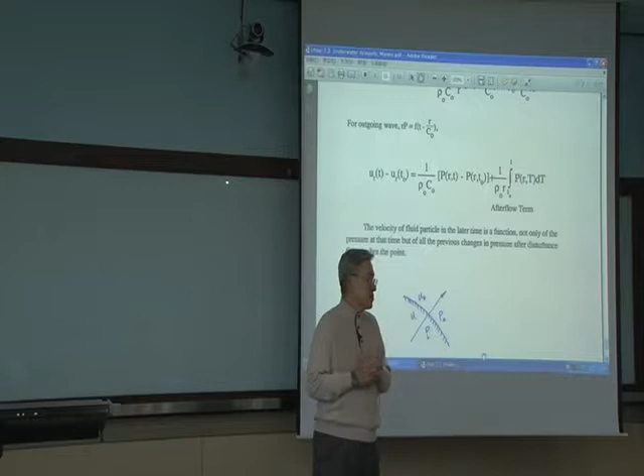I spent some time in chapter 1 and chapter 2, and this is the last part of chapter 2. If you look carefully, chapter 2 contains very important things for underwater explosions.

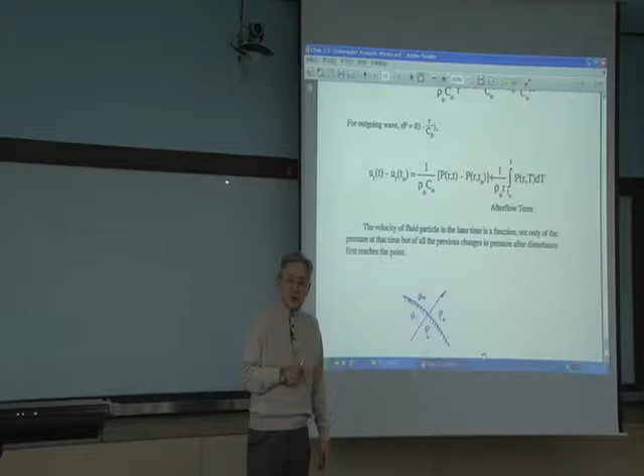This equation is valid for plane waves and also spherical waves. It really doesn't matter. For the plane wave, the second term drops off. Why?

Why does the second term drop off? There is R. To be qualified as a plane wave, the curvature R has to be really flat, which means R has to be large and large. So when R goes large, 1 over a large quantity goes near 0. So you can just delete the second term. So for the plane wave, you have that term only.

U minus U naught is equal to 1 over rho C, times P minus P naught, right? For the spherical wave, curvature comes into play as an important role. So this term is sometimes called the afterflow term or surge.

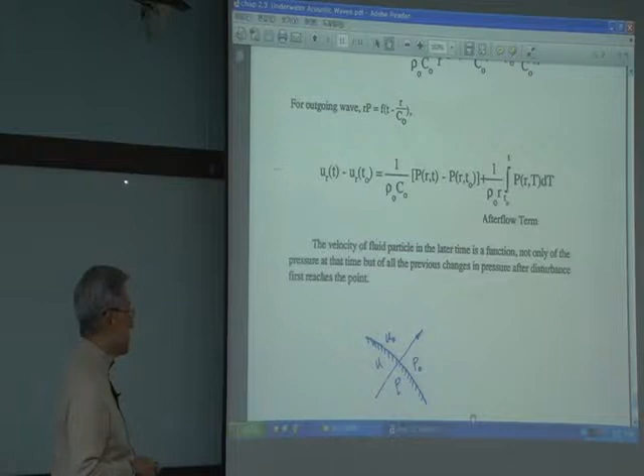So if you look at the spherical wave here, this is a spherical shock wave front moving in the radial direction. In front of the shock wave, everything is calm, very nice. Then bang - the explosion occurs and the shock wave propagates.

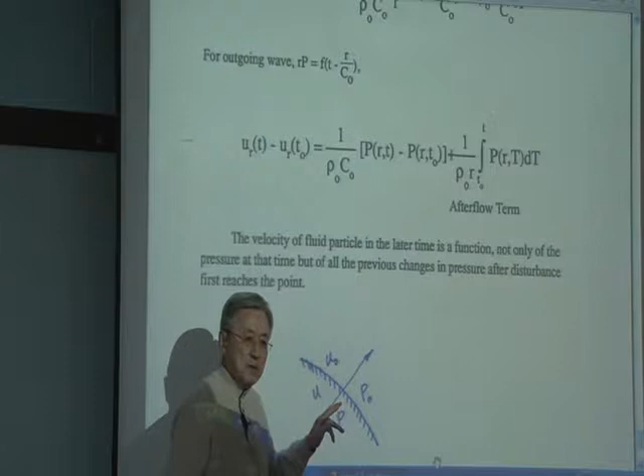U naught, you can usually set equal to 0. I talked about this last Wednesday. Oh, welcome, Yesu.

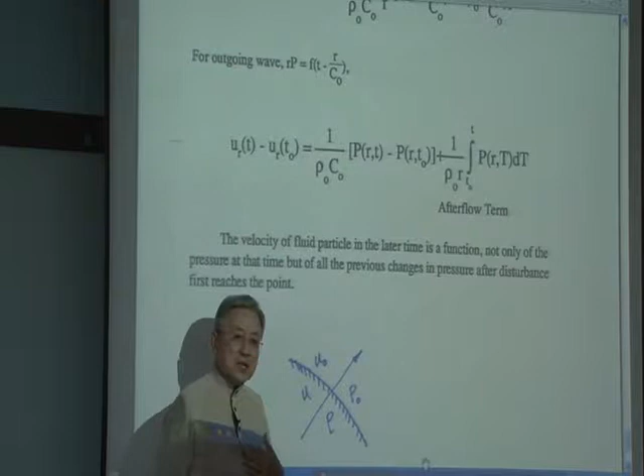P naught is hydrostatic pressure, and U and P are as usual - U is the fluid particle velocity behind the spherical shock wave front, and P is the shock wave pressure. P minus P naught, you can say, is dynamic pressure or gauge pressure.

You put the pressure gauge into the water up to the depth you are considering. Then look at the instrument - you can just turn the knob, set it equal to 0, get rid of this P naught. Then after that, when you measure in explosion testing, the measured quantity is the dynamic pressure, okay?

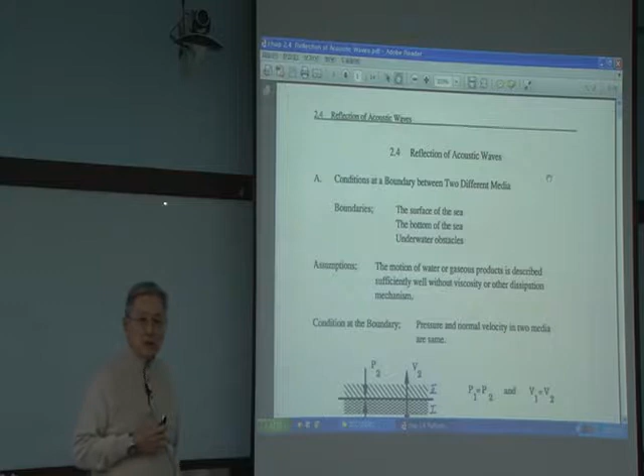The last topic in section 2.4 is reflection of acoustic wave, or shock wave, you can say. And the reflection, if it's just the seabed or bottom of the sea and water, if you consider that, is not much of an issue.

But problems always occur when you have air. So when you have an air-water interface, that usually generates lots of problems. So this is - then explosion could occur here, and the surface ship is right here. Then that's a problem.

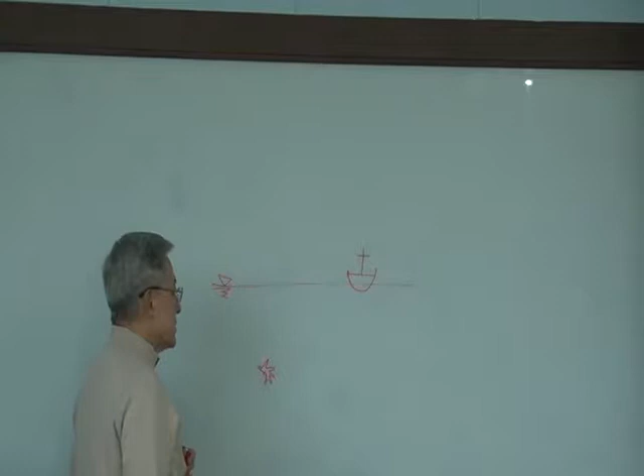In the U.S., even when dealing with the surface ship, for the prediction - or you can say simulation - 2D simulation we started around the mid-1990s. And computing capability is getting better and better. In the late 1990s, we slowly got into simulation of underwater shock problems in 3D.

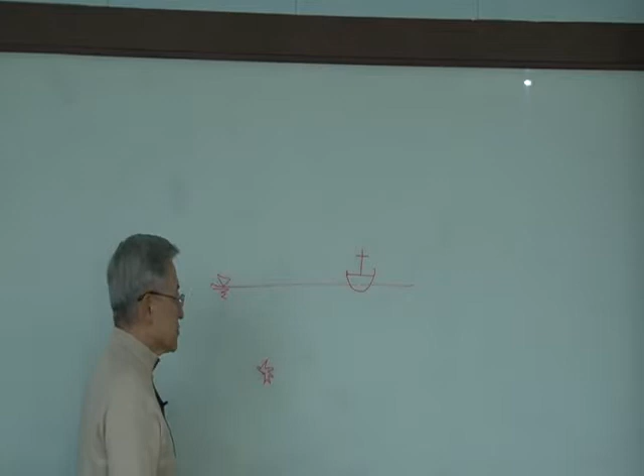After 2000, 3D simulation was very, very possible. But before that it wasn't - dealing with the cross section of the surface ship, so it wasn't good. So this 3D problem and this air-fluid interface problem, a lot of problems exist there.

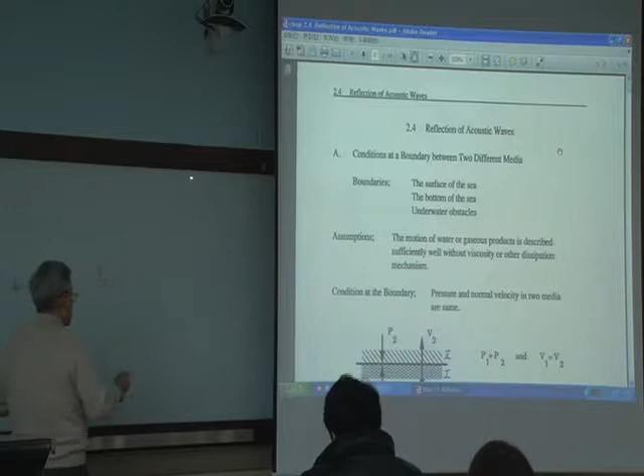So this section on reflection of acoustic wave - I'm going to show you really the air-water interface. Before getting into the air-water interface problem, I'm going to show you a simpler problem set, which is rigid. Rigid is easy. Then explosion occurs - what happens? If I rewrite this, this is water.

Rigid, and I can say this is water. This is rigid. The free surface is way up there, like a submarine problem. It's deep in the water. If you come up to the free surface, the life of the boat is ended. It doesn't matter whether it's alive or not, it's the same as dead. Once detected, that's dead.

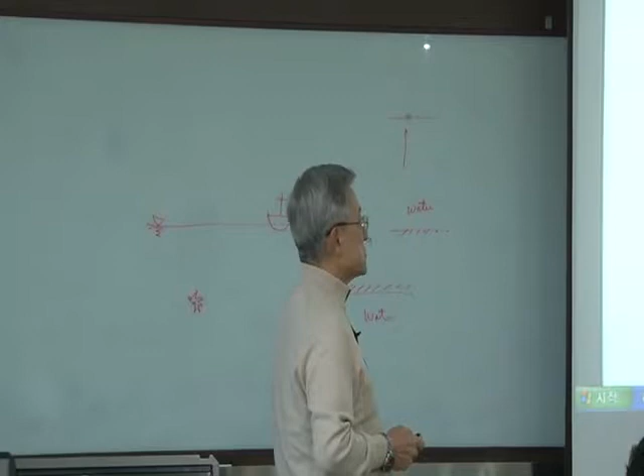No reason to say still survived. So over here, for the reflection of acoustic wave or shock wave, first you can consider the boundary. For the boundary, of course, you are talking about two different media, surface of the sea or bottom of the sea, or underwater obstacles. What can you think of underwater obstacles?

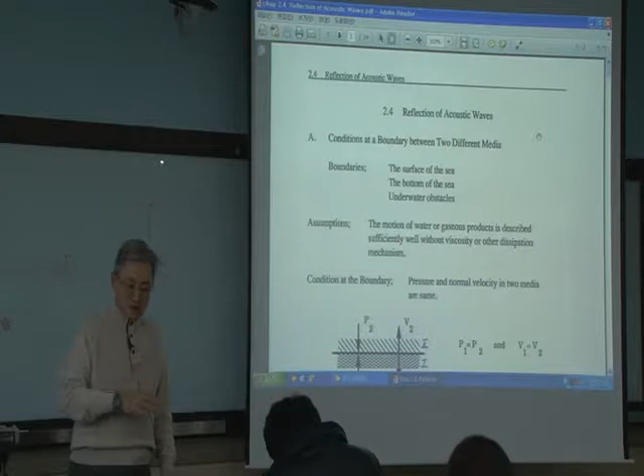Underwater mountain. When we visualize underwater, we always think, oh, it's flat bottoms, lots of tropical fishes running around. But not true. If you look at the East Ocean or West Ocean here, Donghae or Seohae, if you go down there, very severe underwater mountains exist.

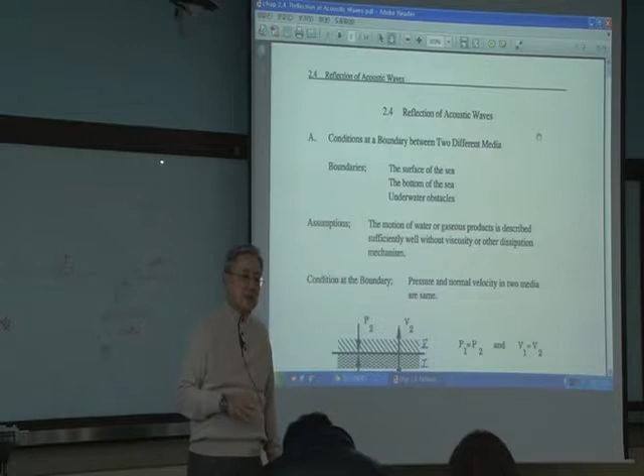Right, Gaulgi, you were in the ocean research institute. When you have lots of mountains, the situation for detection of the target is very difficult, because lots of mountains in the water imply tremendous noise exists in the water. Then trying to detect the target, which means submarine for example, is difficult. But blue ocean is much easier. Blue ocean you can think of as a bottomless ocean. Then detection-wise, much easier than such a mountainous sea, like surrounding Korea.

One of the assumptions for the underwater shock problem, to simplify it—this is very realistic—is that the motion of the water or gaseous product is described sufficiently well without introducing viscosity or other dissipation mechanisms. In other words, to solve the underwater shock problem, you don't have to consider fluid viscosity. Without the viscosity, you can get the approximate result very well.

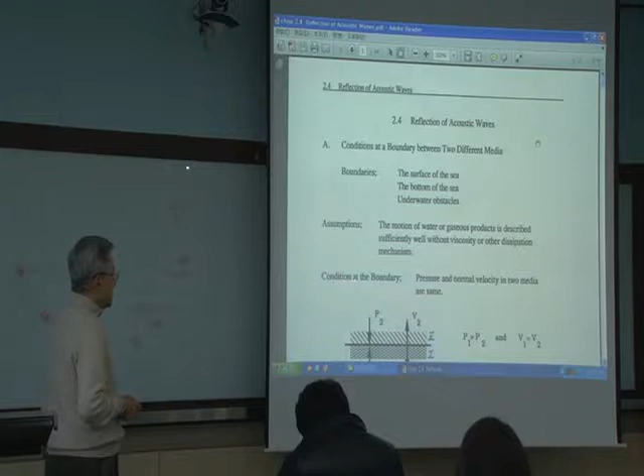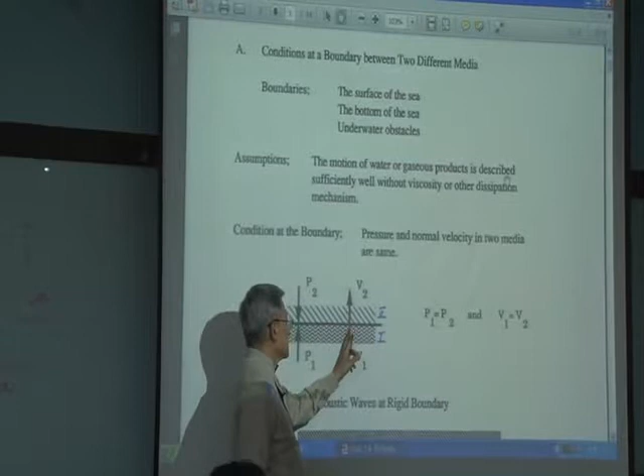And condition at the boundary of two media. So one is something like air and water, or water and ocean bottom, for example. And now, this is a boundary. So this is the normal velocity right at the interface point. I'm going to call that V2 in medium 2, and this is medium 1—right at the interface point, normal velocity is the same. That's one condition.

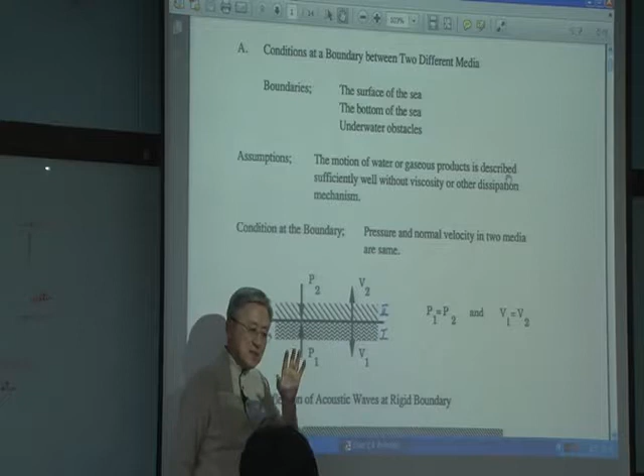Boundary condition at the boundary. But this is wrong, I put the arrow here. Pressure is a scalar quantity, you can't just put the arrow—I always say it's wrong. I should correct it, I should put a dot here in medium 2 and a dot here at medium 1, saying that that's infinitely close to the boundary. So you should really delete the arrow, pointing at the boundary from medium 1 and medium 2. So pressure right at the boundary is the same. So that's the second condition we're going to deal with.

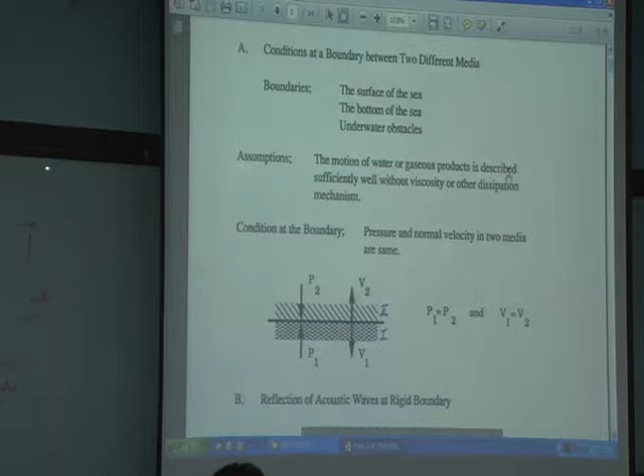Now, reflection of acoustic wave at the rigid boundary here. Usually in high school you use the ray idea: if this is rigid here, a ray is coming in, then the ray is going out, right? That's how we usually handle it in high school physics. Here we're going to really deal with the wave front, okay? So in this case it's really a plane wave for easiness to explain. So this is 90 degrees, so the wave front is moving in that direction, and also for the reflection, the wave front is coming out from the boundary.

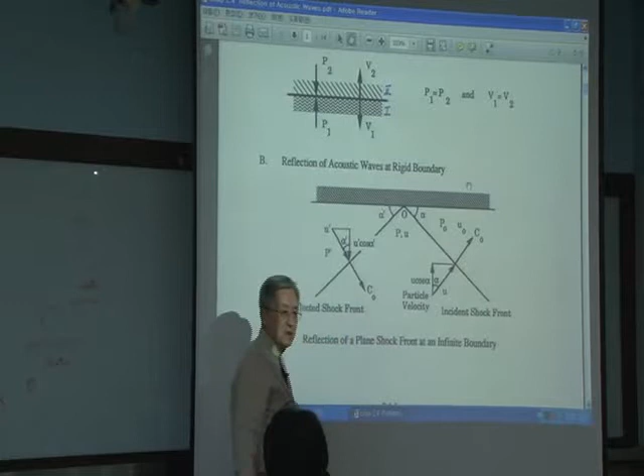So that's what this line stands for—it's called the incident shock wave front, or simply shock front. And this is the reflection shock front. You got the idea. So this is a rigid surface. The shock wave is coming in at any angle, coming straight up here. Then as it's hitting it, the reflection wave starts from here and comes down this way, right? As it's coming up and coming down, so this is the reflection wave.

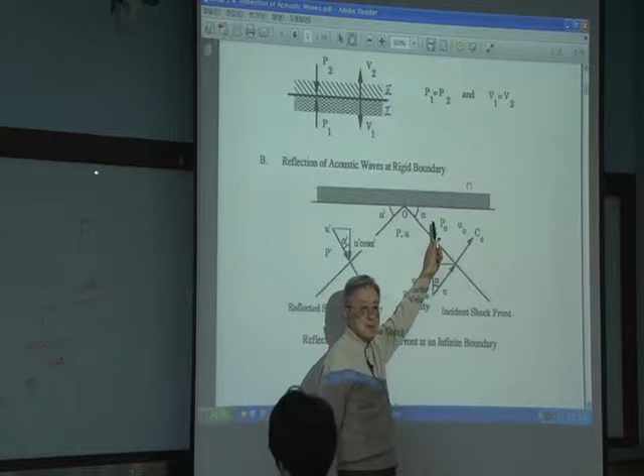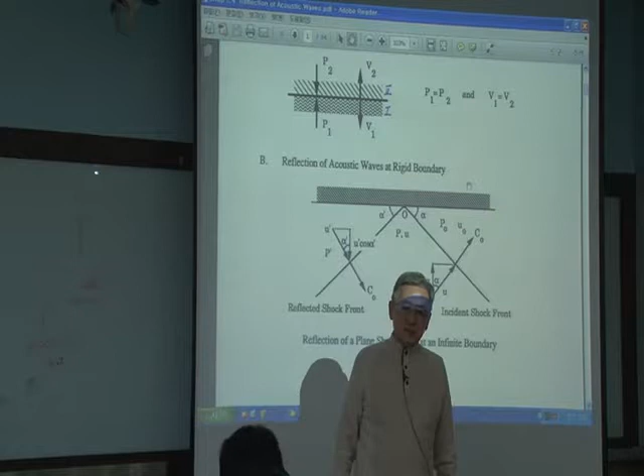Some nomenclature: it's coming in with the alpha angle, and the reflection wave is coming out at the alpha prime angle. In high school physics, it's said alpha is equal to alpha prime. You heard that, right? Without any question, any reason—the physics teacher said this is it, then your answer is yes, that is it, without any question. But that comes from a so-called law—Snell's law. Have you heard about Snell's law? Snell's—we're going to go through this.

Very fundamental, the law which explains alpha is equal to same as alpha prime. In the next page I'm going to show you.

So in front of the incident shock wave, I'm going to say P naught, U naught, and C naught is the acoustic velocity of the water. Alpha. Behind this is P and U. P naught, U naught, and behind here is P, U.

And after the reflection wave, behind is going to be P prime and U prime. So our interest is right at this point here, say point O, is what our interest is to see how the wave reacts with respect to the rigid wall. And this is the fluid particle velocity.

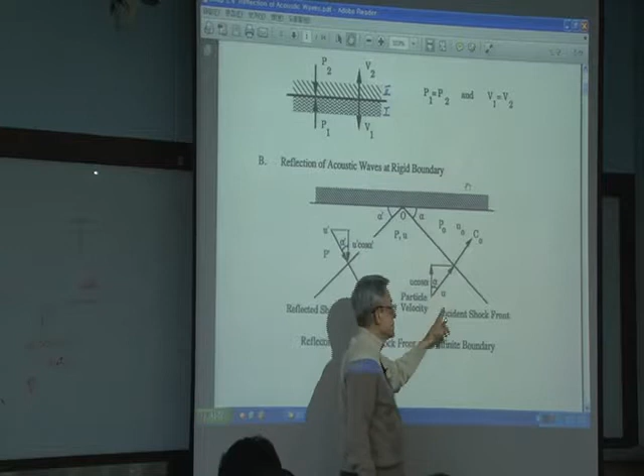Velocity has direction, so it's a vector. So I put u here, and this normal vector with respect to the rigid surface, this angle is the same as alpha, right? Alpha here, alpha here, alpha here. So this normal component is u cosine alpha. Same way, this is alpha prime, and this component is u prime cosine alpha prime.

So that's the geometry before we get into Snell's law. Snell's law is really sophomore physics.

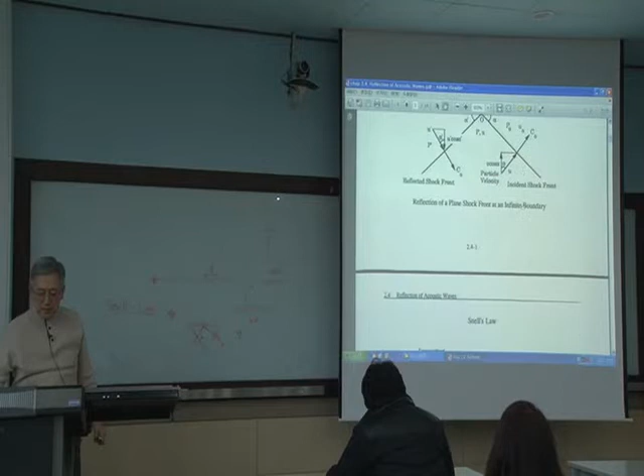Next, I put the slide which I usually put in the last slide of the section, because as I explain Snell's law in general, I can just use the overall situation. In the previous page, this is rigid. But I said, well, to make it general, explain the whole thing as one shot, then you can understand the rigid water interface problem and also the air-water interface problem.

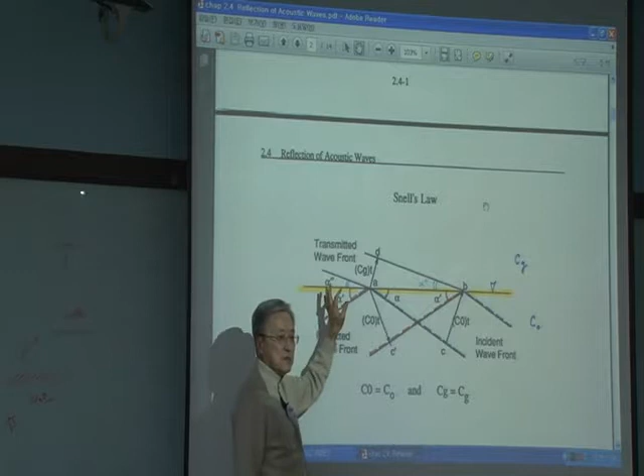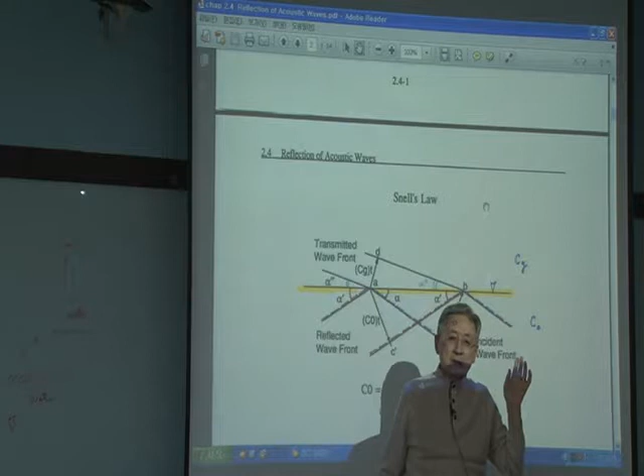Look at this carefully, it's just very simple and very straightforward. This is the free surface, okay? And this is air. I'm going to say acoustic speed in air is Cg, and the acoustic speed in water is C naught. The acoustic speed in water is about 4.5 times higher than acoustic speed in air. So C naught is about 4.5 times Cg. 1,500 meters per second is water, and you divide by 4.5 to get the air acoustic speed.

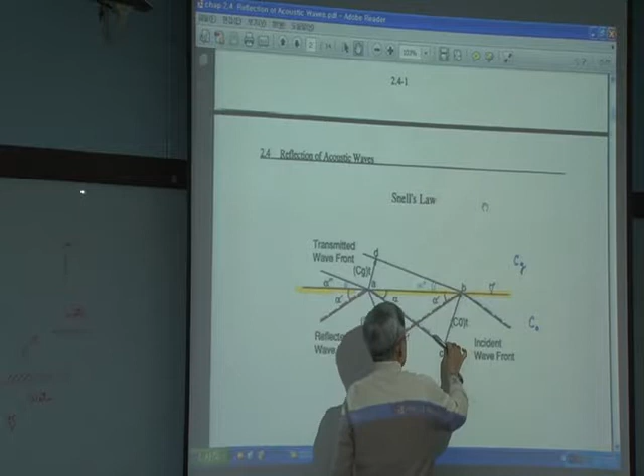So here, I'm going to consider only that portion. This is the incident shock wave moving with this alpha angle, this way. As this is moving this way, as you look at this wave, as it goes up, it's going to come down, right? As it goes up, it's going to come down. Make sense? Does that make sense?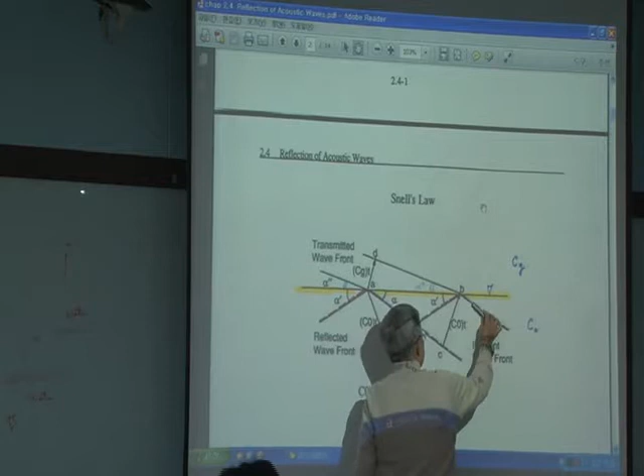So the distance it travels from here to here in the free surface direction is from point A to point B. In the normal direction, it's going to be C naught times t, that's the distance. And as it comes up, this guy comes down. Total duration of time is time t. So as it comes down this way, it's going to be the same C naught times t. No magic here. Now a question arises.

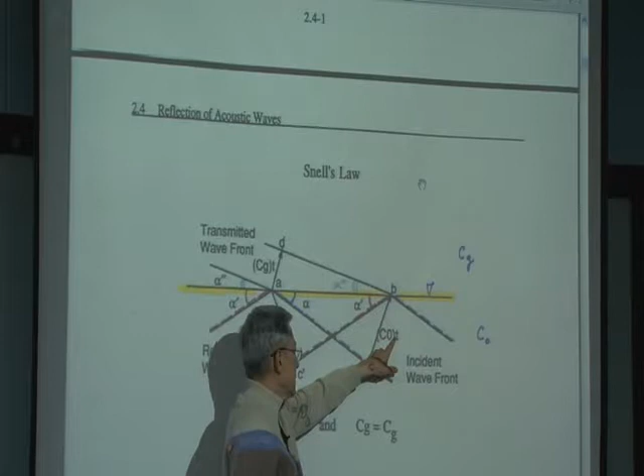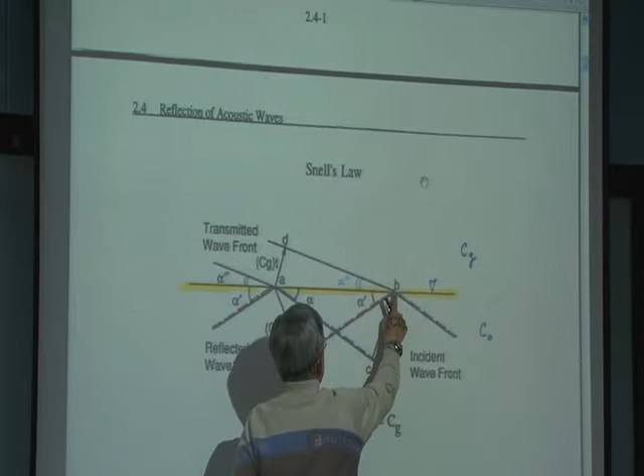Question arises. All we know is C naught, we know total time t, and the speed concerned, acoustic speed in the water, is C naught. As you consider this point A, as the wave is hitting the surface, this guy will hit it first. In that direction it will eventually finish here. So it will take the same time, from 0 to time t, here.

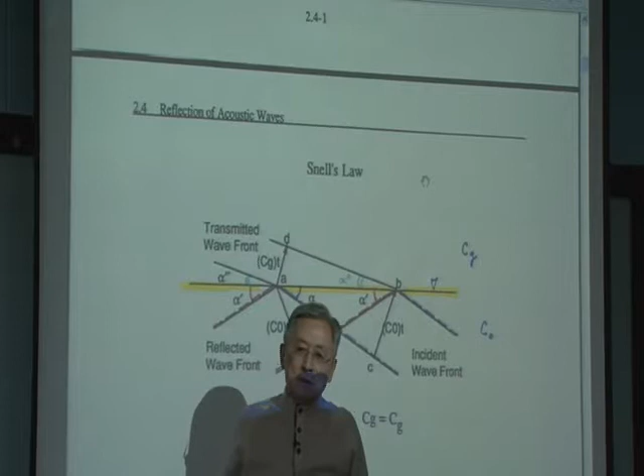What's the acoustic speed, not this direction, this direction is C naught. What about the speed along here? I'm standing here, watch it, how that acoustic speed is going to move in that direction. Is it higher than C naught? Or equal to C naught? Or lower than C naught? That's my question. That's the basis of Snell's law.

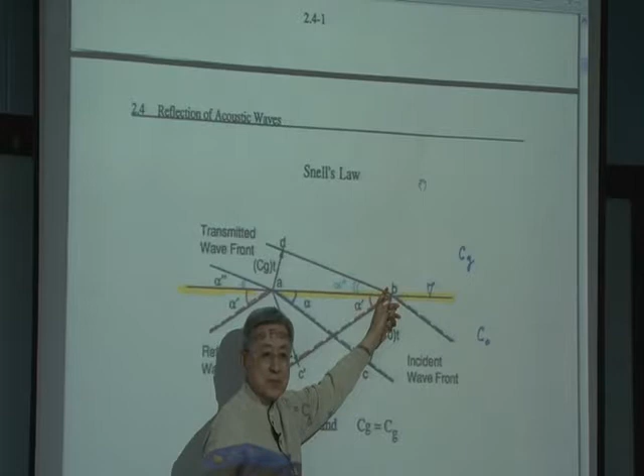It will take the same time T naught, and looking at here, from here to here, I'm going to run from here to here, it will take time T. From here to here, how long is it going to take? Time T, right? So I have to run really faster, much faster than I run from here to here, with the same time T, right?

So before the equation, I'm going to let you visualize in your mind what would be the speed. Speed is from here to here. Keep thinking about the particle hitting along here. That's the question. You catch my question?

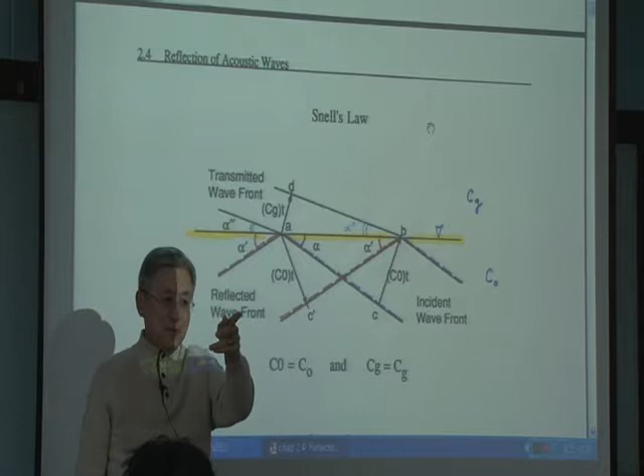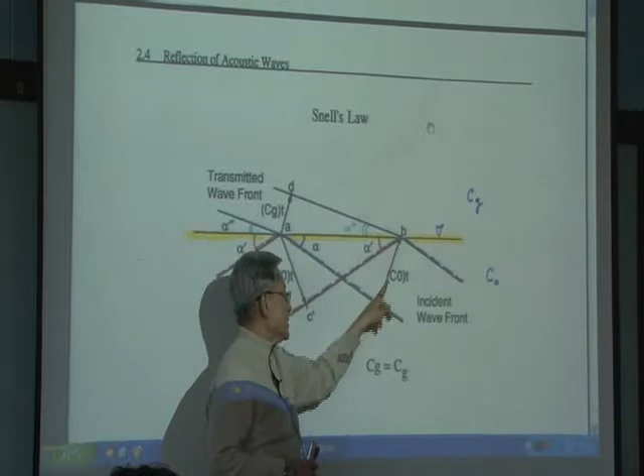Is it faster? Think about the speed of the wave along the free surface. As this wave heads this way, the point along here will hit it, right? You see the speed from here to here is faster than C naught, which is the speed from here to here. The distance is longer, so you have to move fast, otherwise you will be behind. If it's the same speed as C naught, you'd get about that much distance from here to here, so you have to catch up, you have to really run fast.

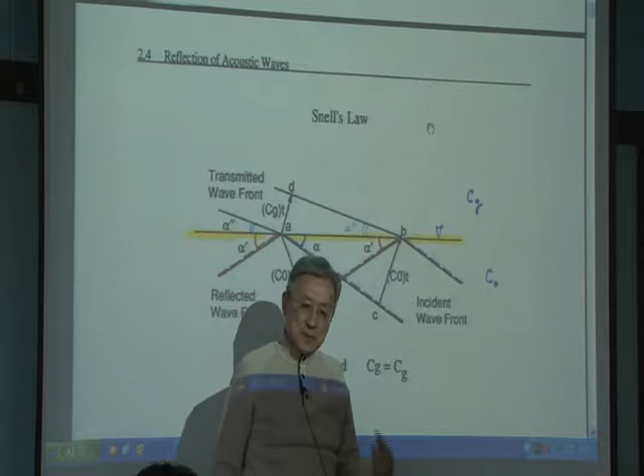That's natural. So that speed is C naught divided by sine alpha angle. That's what I'm going to explain, with the understanding visually before the simple equation. Don't look at me like that. Okay, look at this.

Let's consider this incident shock wave. This is the incident shock wave, moving with C naught speed, and it's going to arrive here. At time t, the incident shock wave will arrive here. The reflection wave at the beginning is here. As the incident shock wave moves, the reflection wave comes down here. Then consider this right triangle here.

The distance AB is equal to, C0t is AB distance times sine alpha. So AB distance is equal to C naught times t divided by sine alpha. So I wrote down here, AB distance is equal to AC.

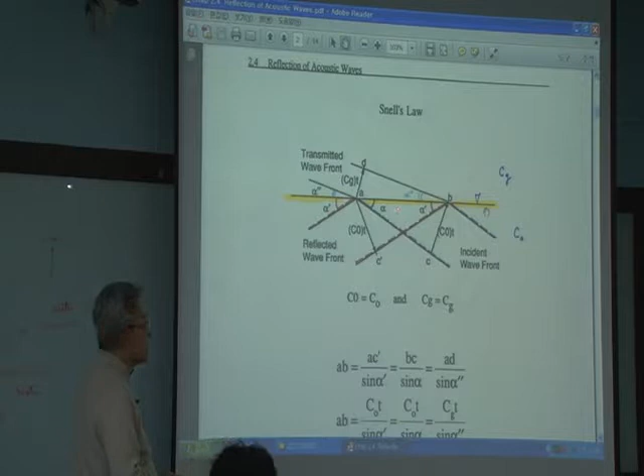Now for the transmitted wave, this is air. This is 90 degrees right here. So AD is AB times sine alpha double prime, which means AB is equal to AD divided by sine alpha double prime. So that's what I wrote here. Simple, very simple.

This is the sine equation, but that's what Snell's law is. So here AC prime is C naught times t, and BC is equal to C naught times t, and CG times t is this d distance. Then what you can do is just move t down here. This relation you don't have to memorize, it's well known, the Snell's law: C naught over sine alpha, C naught over sine alpha prime, CG over sine alpha double prime. This is the speed along the surface, the free surface, due to the incident shock wave.

This is due to the reflection wave, and this is due to the transmitted wave. So this is really nothing but the wave speed along the free surface right here. This one page shows nothing but Snell's law.

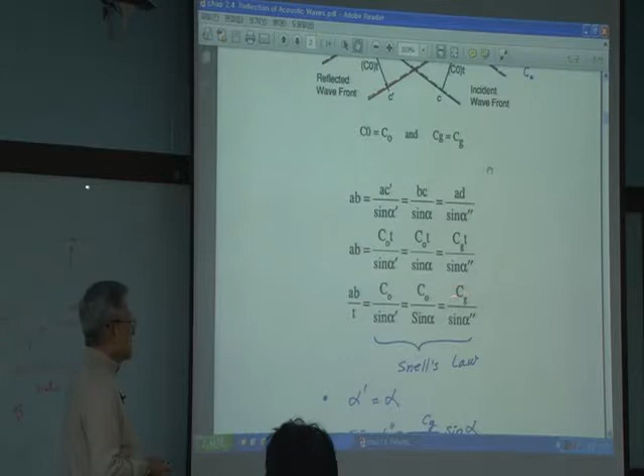So from here, these two equations give alpha equal to alpha prime. Also, between the fluid medium and the air medium, you can rewrite this equality as sine alpha double prime equals CG over C naught times sine alpha. Alpha is given because that's the angle the incident shock wave makes hitting the free surface, or rigid surface, it doesn't make any difference. This is Snell's law.

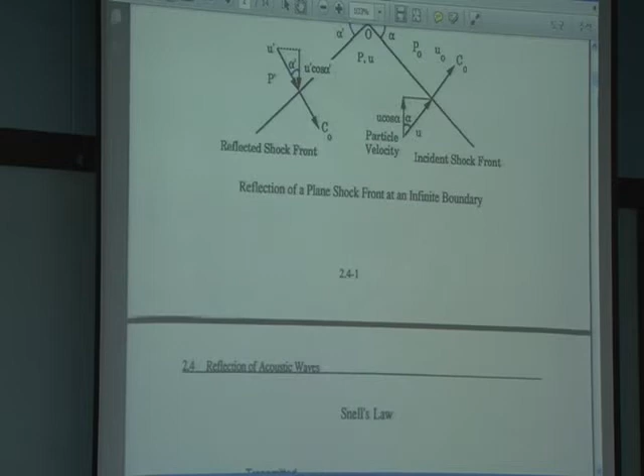And with that information, alpha is equal to alpha prime. For the rigid boundary with the water, as you see on this next page, C naught over sine alpha is equal to C naught over sine alpha prime. Alpha is equal to alpha prime. So this is the equation for the shock wave velocity parallel to the boundary.

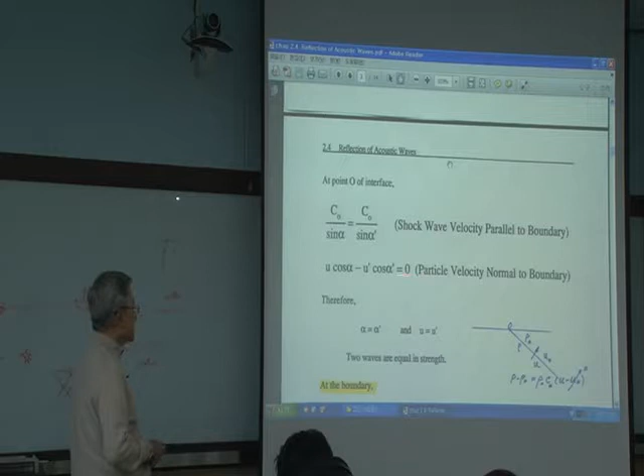And u cosine alpha is equal to u prime cosine alpha prime, which is the fluid particle velocity normal to the boundary. This is for the incident shock wave, normal to the boundary. That's the situation. You can call this the compatibility condition right at the boundary. This plus that, plus and minus, equals 0, because this takes place all along here. We are looking at point O, so u prime cosine alpha prime has to equal u cosine alpha. Right here is the rigid boundary point, so the sum has to equal 0.

Okay, with all this information, you can say the alpha is equal to alpha prime. That's what we confirmed from here. And u in Snell's law, u is equal to u prime, which is particle velocity normal to the boundary.

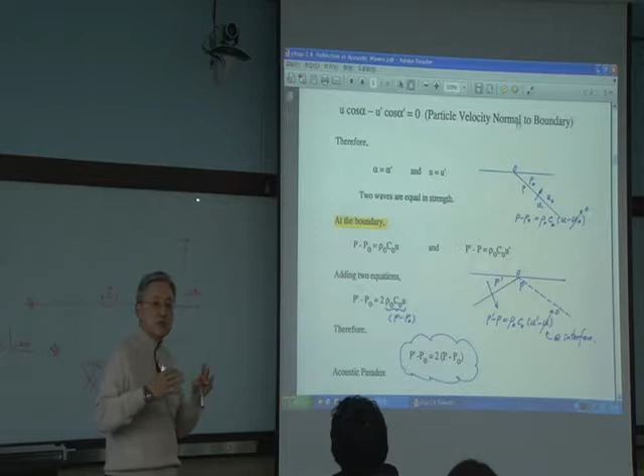One assumption is there is no loss in the boundary. Usually right at the boundary or seabed, whenever you face the boundary, there is energy loss because damping comes into the picture, things like that.

This is the incident shock wave situation. P minus P naught is equal to rho naught C naught, U minus U naught, for the plane wave. If it's a spherical wave, you have one additional term. For simplicity I introduce just the plane wave, but when you deal with a spherical wave you have to consider that additional term. I think I gave in exam problems some years ago, to derive all the equations for a spherical wave interface problem.

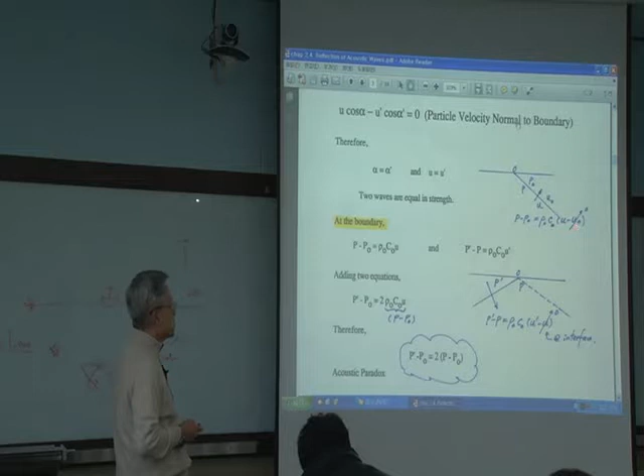I said u naught is equal to 0, talking about point O. This section is for the rigid boundary. For a rigid boundary, u naught, the initial fluid particle velocity right at the rigid surface, is equal to 0. So right at the boundary, P minus P naught is equal to rho C u.

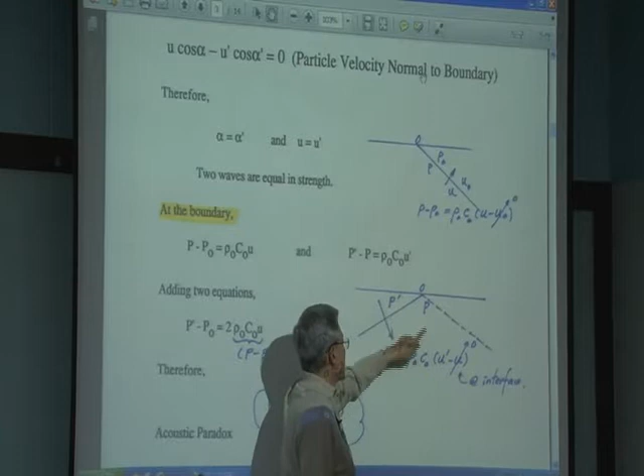Naturally, but this part is the reflection wave. Reflection wave, you are dealing with the front and the rear, or back, of the reflection wave. So looking at that, behind this, P prime minus P, we are really considering around the intersection point right here. Behind it, u prime is coming right out, and u is equal to 0, which is still at point O in front of the reflection wave.

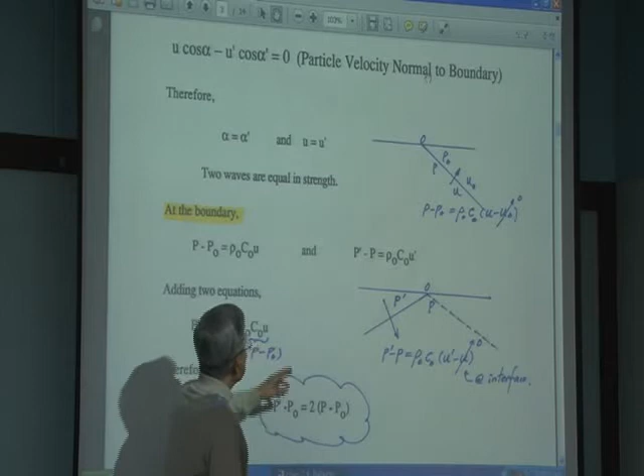Sometimes it's not that easy. For some people it's difficult to be convinced why u is equal to 0. For the reflection wave, behind it is u prime, but right in front, right at the boundary, u is equal to 0. Think about infinitely close to the boundary, before and after. So at this point the term is equal to 0, and then you get that equation.

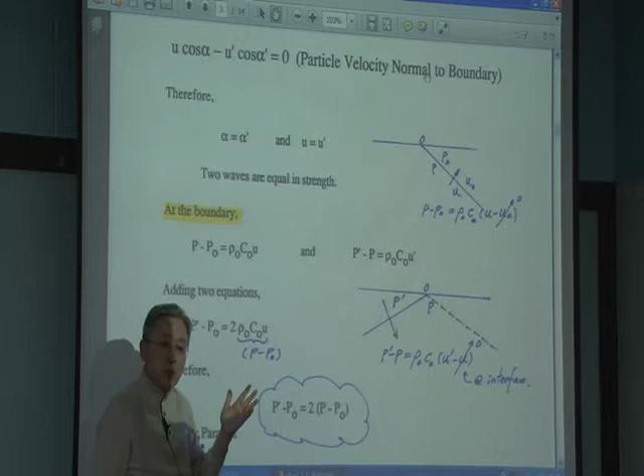So now you can add this plus this, and a factor of 2 comes right out. What does it mean? This 2 is the pressure experienced by the rigid surface, which is twice the incident shock wave.

So what occurs here is called the acoustic paradox. What happened? This is rigid, and I have a shock wave coming exactly parallel to the boundary, coming this way, not this way. Except exactly at 90 degrees - this is the wave, this is rigid - when the wave comes in at any other angle, the pressure experienced by the rigid surface is twice the incident shock wave, as I explained using the physics itself.

But if it's exactly 90 degrees, there is no reflection wave. In that situation, the rigid surface will experience exactly the same pressure as the incident shock wave. Make sense?

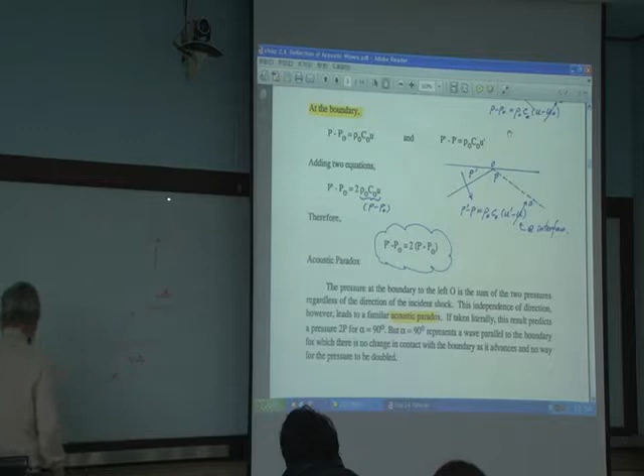Don't look at me like that. Right? If it's exactly 90 degrees, there's no such thing as a reflection wave. No reflection wave. So this is rigid, and I have exactly a 90 degree wave coming in - there is no reflection. Where would the reflection occur?

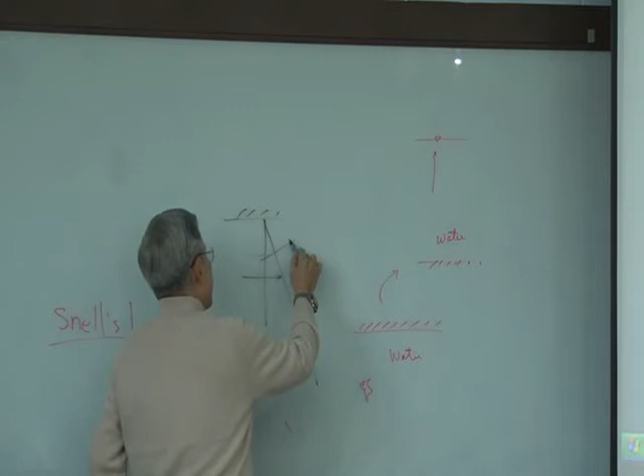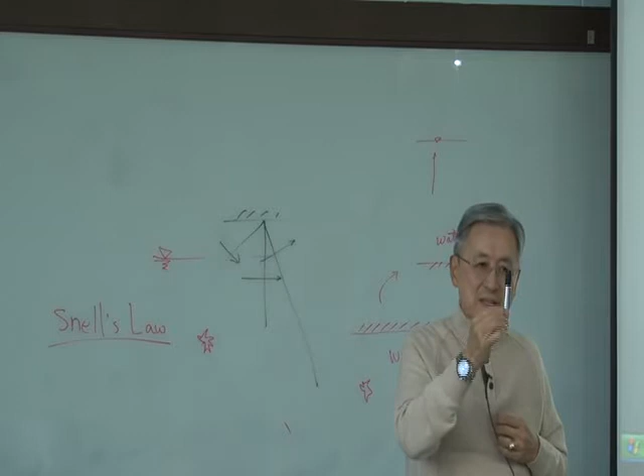So any angle except 90 degrees, if it comes in, then there is a reflection wave. But the question with acoustic paradox is: is this a disputing element? Do we have to consider that situation happening sometimes? My answer is no, because physics says the situation where the wave is exactly 90 degrees with respect to the rigid boundary...

But in reality, in the physical world, there will be no such situation. Why? Because in the real world, if the angle is off from exactly 90 degrees by even 0.00001 degree, a reflection wave will generate. So in general I feel we don't have to worry about the acoustic paradox at all. Always say that the rigid surface will experience twice the incident shock wave. I think that's really enough, rather than disputing the acoustic paradox.

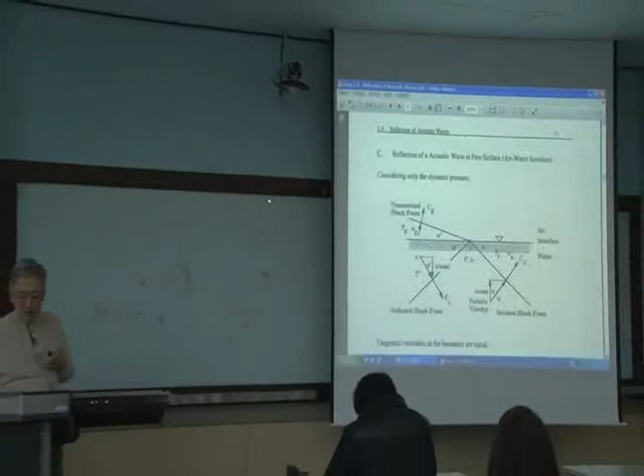You don't have to really worry about it, that's my claim. Now this is the free surface. For the free surface, I already explained when you deal with air, fluid, and the interface problem - this is the transmitting wave, this is the incident shock wave, and this is the reflected shock wave.

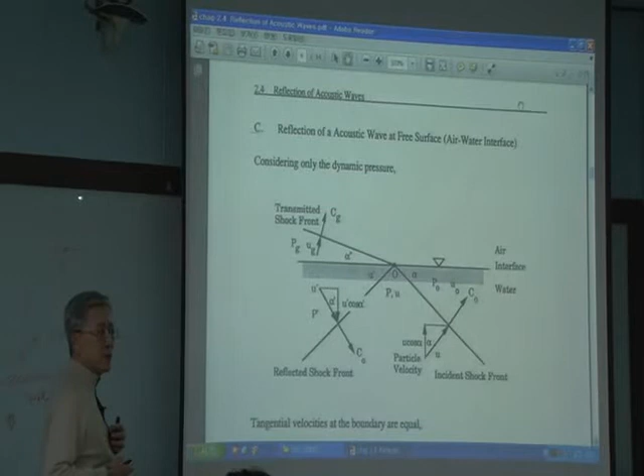Regardless of alpha angle, alpha is equal to alpha prime. As you compute yourself in a minute, in the example problem, this alpha double prime angle is very small. Put that in your mind. When this is very small, it means this wave is moving almost straight up.

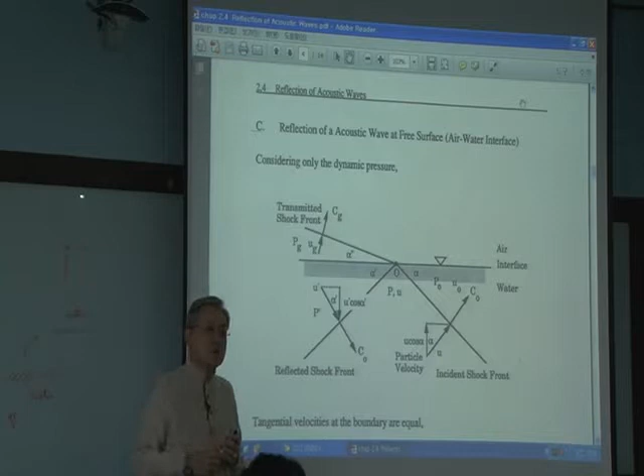What that means is when you consider this point as a fluid particle point, and consider that point as an approximation of a surface ship sitting right here, what would be the kickoff direction? Almost straight up, because alpha double prime is very small usually, since the impedance in the air is very small compared with the water.

So Snell's law, as we already looked at, applies here for the transmitting portion, and all this is really acoustic speed along the free surface, by incident shock wave, reflection wave, and transmitting wave. For transmitting, you can use the word refraction, R-E-F-R-A-C-T-I-O-N, that's another way to call it.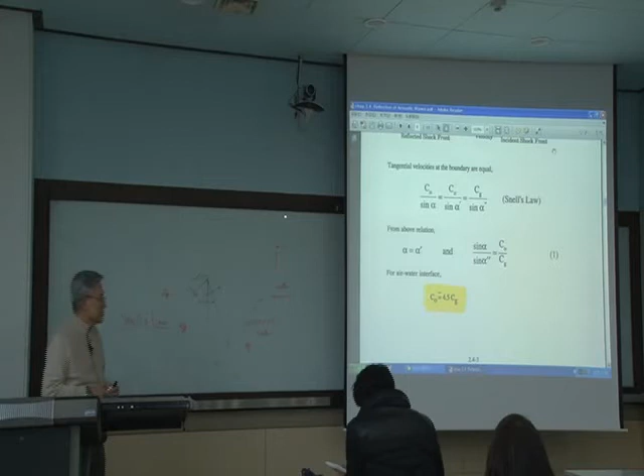And this is all coming from the relation here, coming from the relation there. And the air-water interface speed ratio is about 4.5. Pretty good, okay, 4.5.

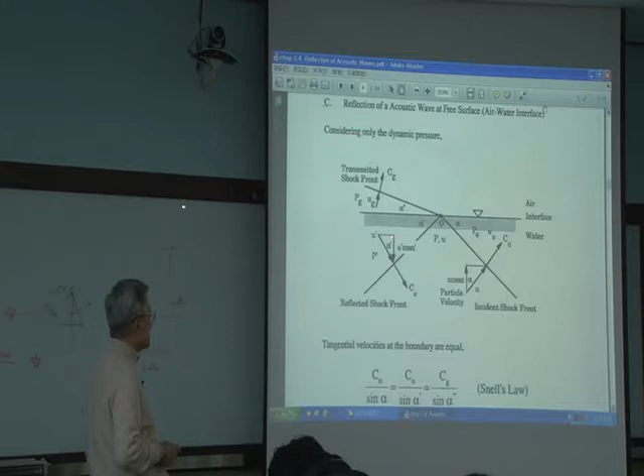And of course, this is the fluid particle velocity normal to the free surface, which means right here, normal. So in water media, if you look at U cosine alpha, which is 90 degrees, upward direction is positive, this is a negative direction. U cosine alpha minus U prime cosine alpha prime has to be equal, right at the intersection point, to the air particle velocity, which is UG cosine alpha double prime. So normal directions like this.

So that's what it shows in the next page, right here. Next, so all three waves here, right at the interface, the air-water interface point. Consider first the front and back of the incident shock wave. Then the general equation set is here.

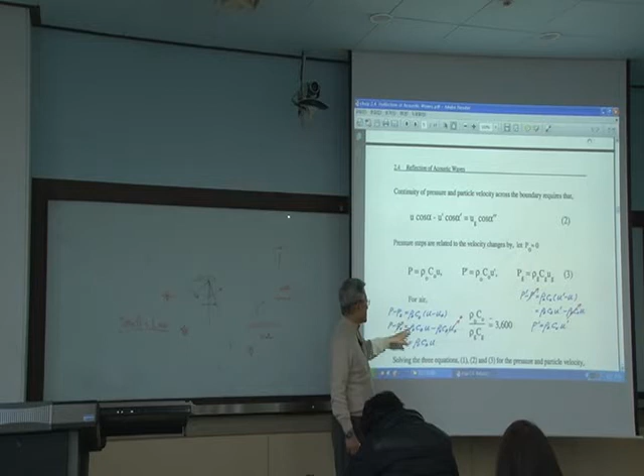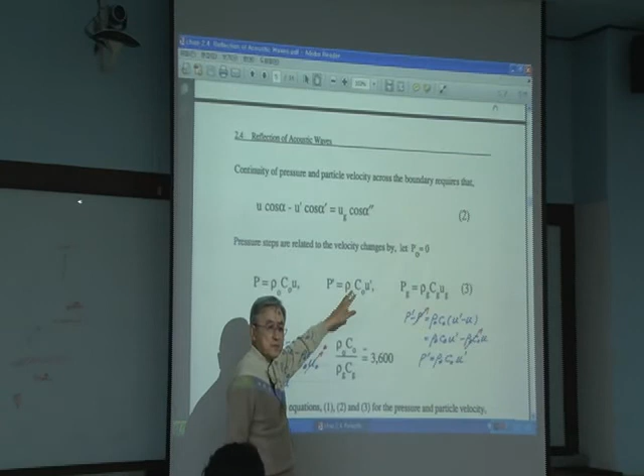P minus P naught is equal to rho naught C naught times U minus U naught. So here P naught is equal to rho naught C naught U naught, the static pressure, so that cancels out. You have P is equal to rho naught C naught U, for the incident shock wave, and for the reflection wave, front and back of the wave, you can consider this portion I show here. In the same way, you can say in the air media, PG equals rho G, CG, and UG.

That's one equation. And the impedance ratio is generally approximately 3600 difference, okay, so the ratio is 3600, very large. Impedance in air is rho c divided by 3600, so it's very, very small.

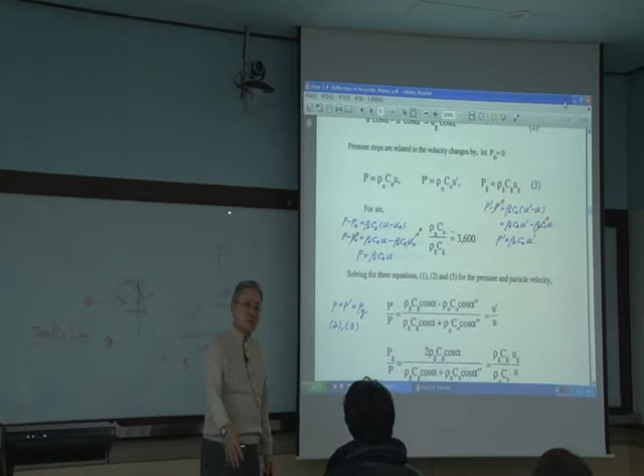That's the reason, as you will see in the example, that when you have explosion testing underwater, I can stand about 50 feet away, about 20 meters away from the actual explosion point, and I'm fine. But if I put my feet in the water, then I will have a shock wave hit my foot. If I stand away, the pressure escaping from the water out to the air is very small, almost none, so you don't have too much to worry about. But still, in the test site, for safety reasons, you have to evacuate about 1 mile.

There's no real reason to move away that far, but for the safety quotient they still do that, miles away from the test site. Okay, this is a homework assignment, two very important equations, then I'll finish. This is a very important equation.

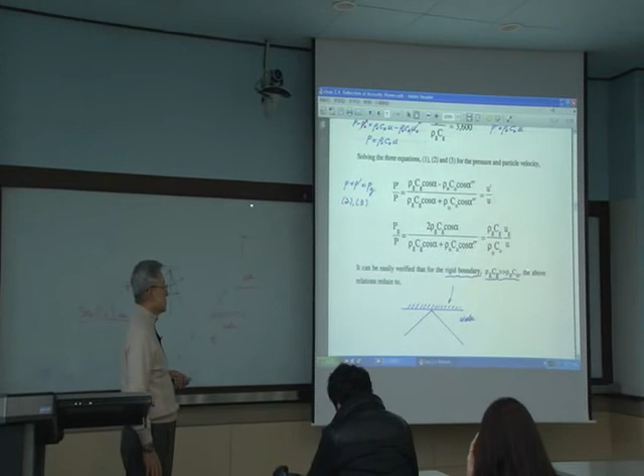So solve this problem, and also verify it yourself using this equation. If you replace air with a rigid surface, you have to make that condition where the impedance of the rigid surface is very large compared with rho naught C naught. This is water, this is air. So you can use this very good approximation, plug it in here, and confirm the result for the rigid surface water interface problem, which is over here.

I'll explain this Monday briefly, and one example problem I want to go through. PG is the pressure that escapes into the air, a fraction of 1 psi. This is the case for 1,000, P is 1,000 psi, then actually only a fraction of 1 psi escapes into the air, which means the shock wave almost cannot escape out of the water.